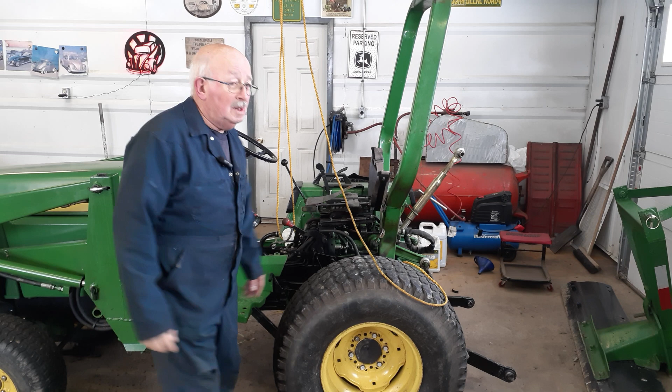If you watched our last video, we had leaking going on right here in this area of the tractor, leaving puddles, and we saw it was leaking out of the 3-point hitch, the flow speed control valve, and all it was was a little O-ring on a spool that was worn out. So we fixed that. That was great, but unfortunately it didn't do it all. Now we find the transmission's leaking. I'll show you that in a minute, and we're getting ready to pull it out.

But more important than the leaks is this little bolt. This $3 bolt could save you thousands of dollars in labor. So make sure you watch this, and I'll explain what I'm talking about.

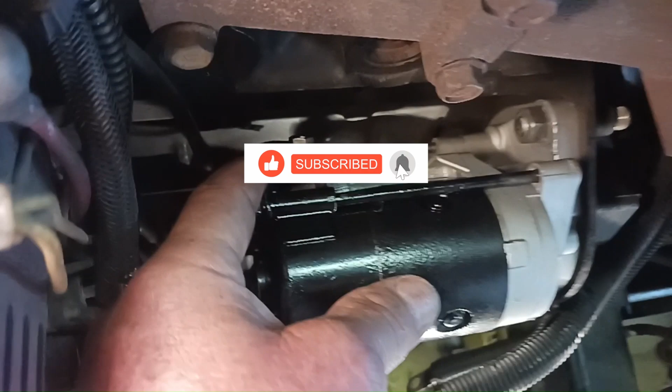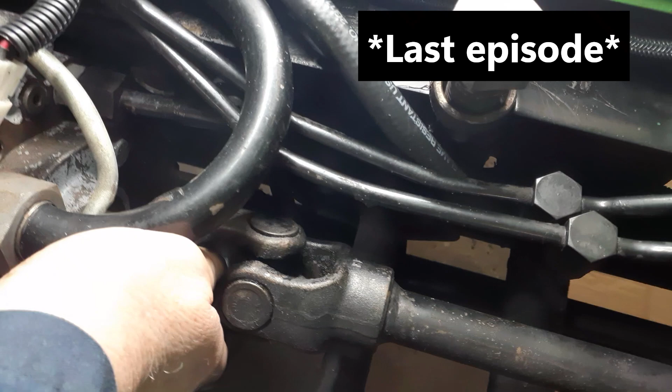But now we have multiple leaks on the transmission. If you look back on last episode, the first leak we have is down at that input shaft. Get in there. Yeah, so that's leaking there. On its own, that would be a pretty easy fix. I would just undo those 2 bolts and that would come off and I could put a new seal in it. But that's not the only leak.

If you look over here, we have a lot more oil coming off there. And I took this off. So that's the 4-wheel drive shaft, and that's not leaking. Where it is leaking is right here at the seam. You can see it just running down there. So today we're going to take all that apart.

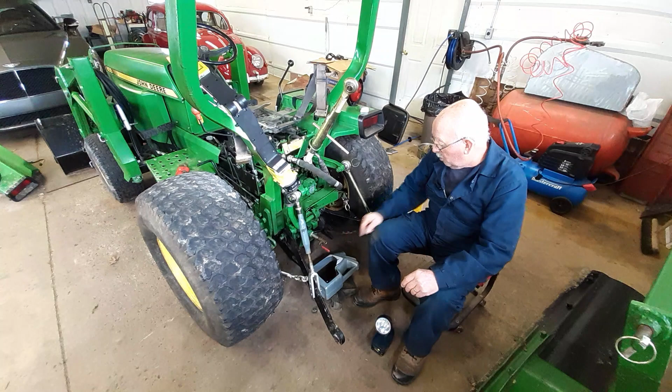At the end of the last episode, we had started draining this. We're almost done. Shouldn't be much left in there, but the less in there, the less pressure. So it's getting slower and slower. There's about 5 gallons in there, and we've got about 3 so far. So we still got a couple gallons to go. Might as well start working on some of the other stuff.

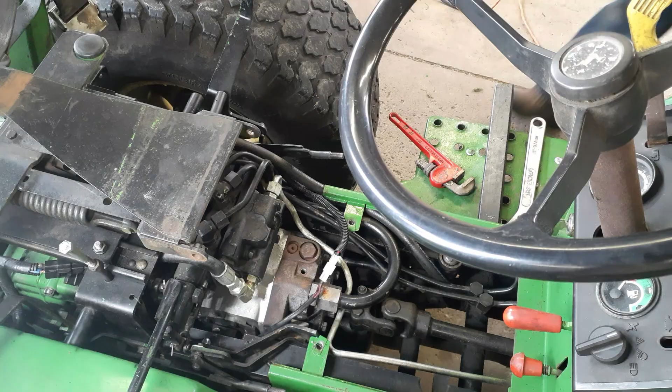So while that finishes draining, let's disconnect the neutral switch here. Get that out of the way. The switch is going to come off with it. And then this is the suction line. I don't know how tight that's going to be, so I got a little extra here. That wasn't too bad.

Oh, there we go. Let me grab a screwdriver here, and I'll loosen this off, and then we'll be able to rotate that line, give us a little bit more clearance. Let's see if we have a bit more room to turn that now. Maybe not. Might be easy to just take it right off, I think. I don't know. There, after a little bit of arguing, I just pulled it right out of the way.

Okay, and this line's going to have to come out. I guess I should have put a drain pan on there. I got a mess to clean up. I didn't think there'd be that much oil in here, but I was wrong. So now I got a nice big drain pan under there. I have to get this out of the way.

And the transmission is going to have to come out forward and drop. So get this out. Take the drive shaft off. Hopefully that's high enough. That should be high enough. And you have a power steering line here. Fifteen sixteenths.

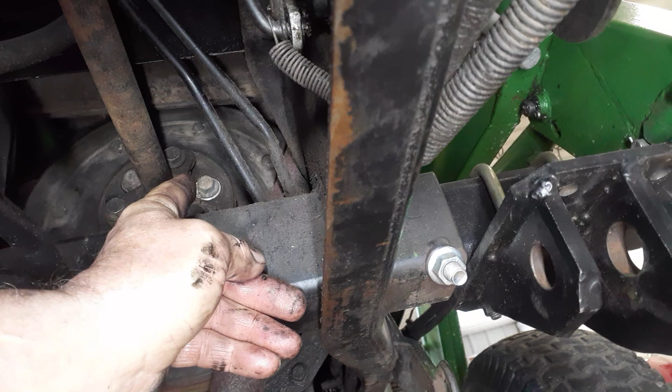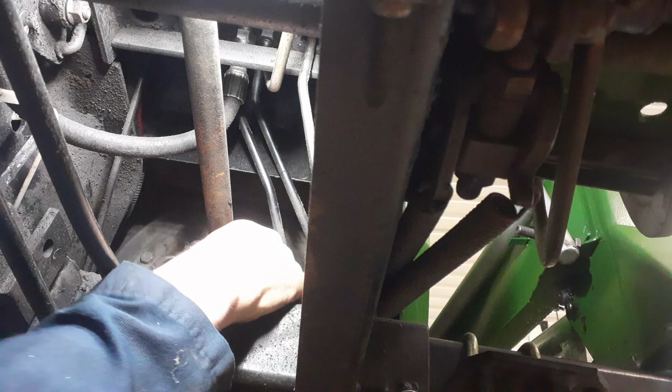So this here, that's where the input shaft comes from. That's basically a drive shaft right from the motor. And you have to undo the 3 bolts there, and you should be able to take that right out. One. Two. I might have to turn that a little bit. How's that? Yeah, that should get it.

Yeah. I think that should be all it takes. I don't think you have to undo all 6. Nope. There we go. Now. Maybe, oh, there we go. Perfect.

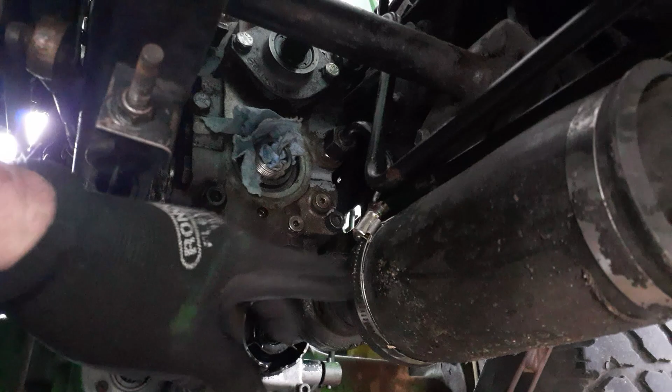So as I showed you before, I already got this loosened off and out of the way. And there's another one at this end. Take the 2 hose clamps out. And just have to line it up. Just line up the shaft. There's one of these pins in the shaft there. That's all that holds it on. Just use a drift and drive it out. Once the pin's out of the way, it just slides off.

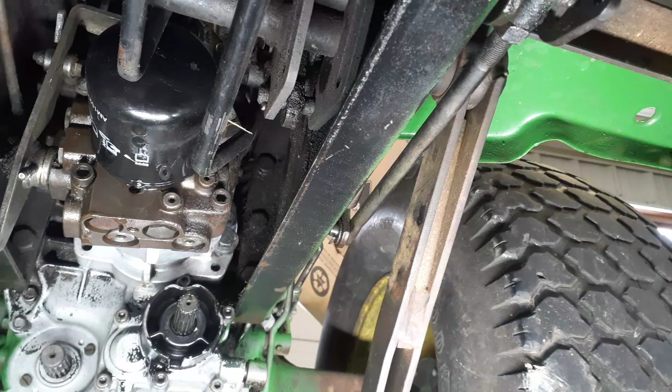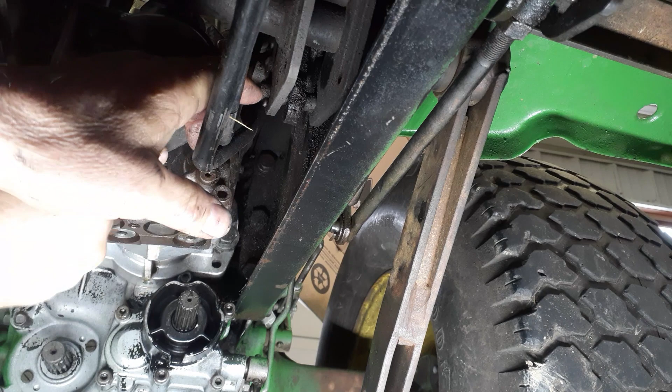There. Okay. So the next thing to come off is the transmission filter. Put the wrench on the right way.

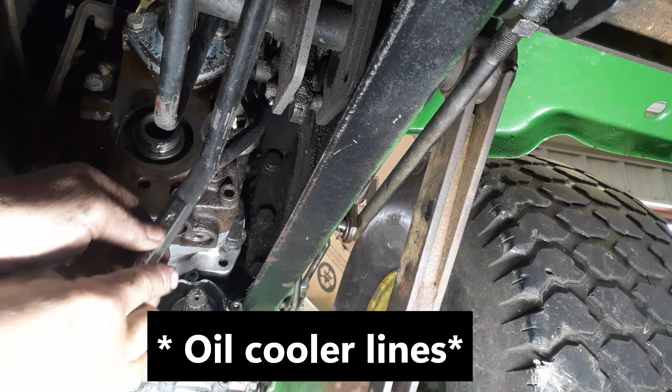It's that much less oil in the transmission to wear when it comes out. There. Get that out of the way. Now that last transmission line there, of course that's bigger. Back to the 15. So this is the other line that goes to the oil cooler. There.

Okay. Now we have to take this linkage off. And there'll be one bolt inside there we have to take off. Right there. Now you don't want to change the position of that nut, because this is what adjusts your pressure on your neutral switch. So I'm hoping to not have to do any adjustments afterwards, but I probably will. But I'm trying. And screwdriver.

Spring comes out. Maybe not. That doesn't like the last couple of threads. Let's see if we can get the spring out anyways. There. Let that hang. That stays there. And all there is the other end of this arm up in there. Let's see if I can get that in there.

Okay, so I have to undo that bolt right there. That's the only part of the linkage we have to undo. It's on both sides. I don't know if I can show you, but we'll definitely try. Okay, 13 on both sides. For now, see if there's any bushings or anything in here. Don't want to lose those.

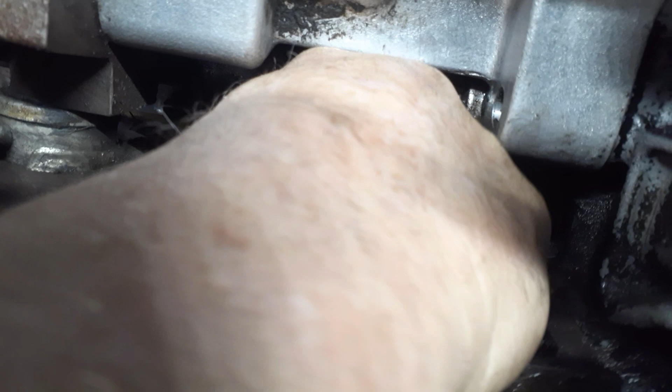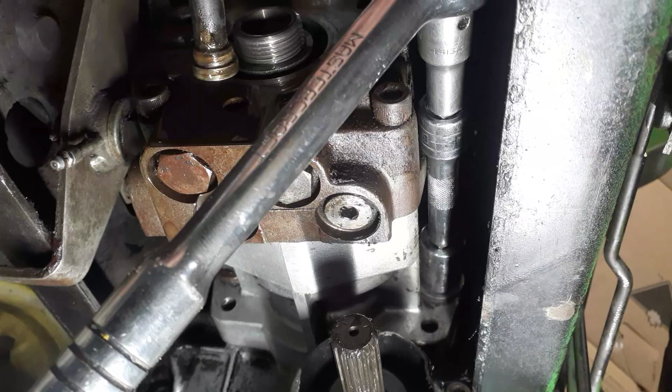My nut. There is a bushing up there. I'm going to put the nut right back on there. It stays long enough for me to put the nut back on. There. That's it. So all it takes now is a bolt there and a bolt on the other side, and that should come out. So we got that bolt undone. And there's another one right there. So they're both loose. So now I got to put a sling on this thing.

All right, so I got my little block and tackle set up here. And I've got the two bolts out of there. So basically that should be everything. This thing's not really that heavy. Maybe, I don't think it's 80, 100 pounds. So this is good for 500 pounds, so this should be fine. Let's see what happens. I'm gonna tighten that up a little bit. All these hoses in the way. There.

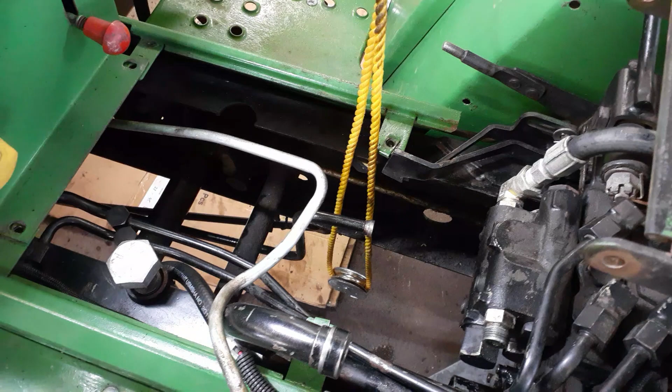Well, it's out, but it wasn't easy. Every single line and little square edge and shaft caught on everything. We had to wiggle it this way and twist it that way. Finally, we got it dropped down, and here it is right here.

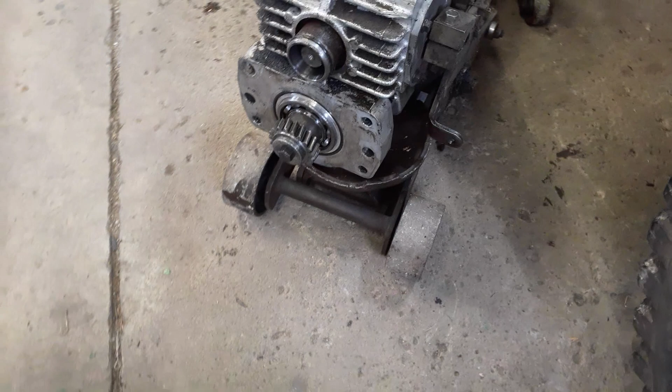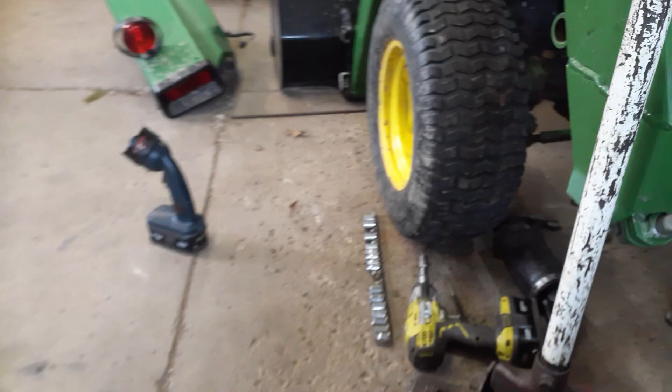So this is what's causing our leak. See that O-ring there? All hard, and this one here is really flat. So I'm thinking that both of them are probably leaking. But while we're here, we'll clean it up. And of course, we have to change the input shaft seal. So we'll change that, change a bunch of O-rings. And once I got it cleaned up, we really got to talk about this thing.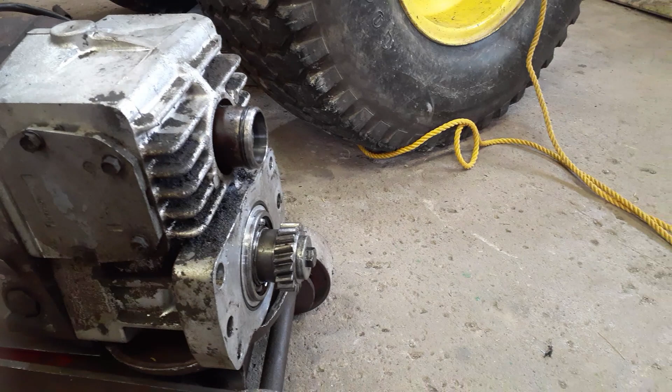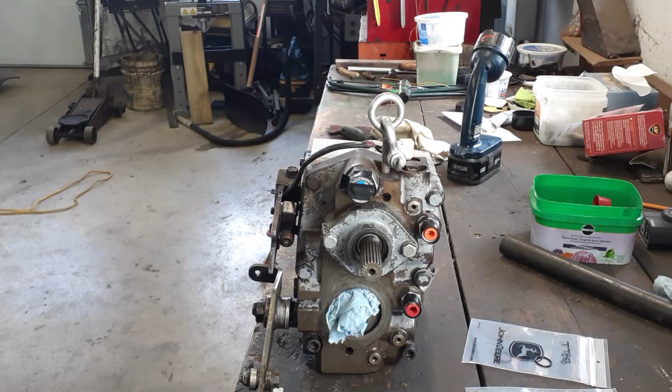Hey, so we got the transmission all out, washed it all off, got most of the grease and guck out of it. So let me bring you in and see what we're going to do to seal it up. Okay, so we pulled those two O-rings out of there. Those two, we got two new ones there. The big one there, that's here. So we got all new O-rings there. And we wanted to get that seal out of there.

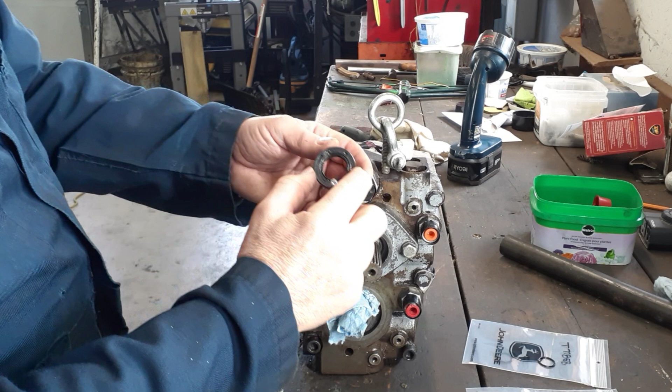You could take this off and maybe push the seal and the bearing out from the other side, but pretty easy, if you're not squeamish, just drill a little hole in it, put a sheet metal screw in there, and you just pry it out with a screwdriver. I had to do both sides. It came out real easy. And I got a new one right here. There's the part number if you guys need it. So I'm going to put this in right now. I'm going to put a little bit of oil on it, and then we'll push it in.

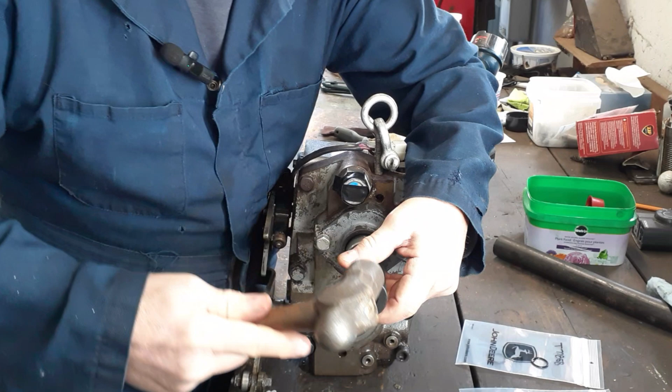I just happen to have a 7/8 locking collar, and it fits perfectly on there, and it fits right in there quite nicely. And around. And as soon as I find my socket, oh, there it is. I've got a 1 1/16 socket there. And that fits in here just nice. There we go. That's it, we're in.

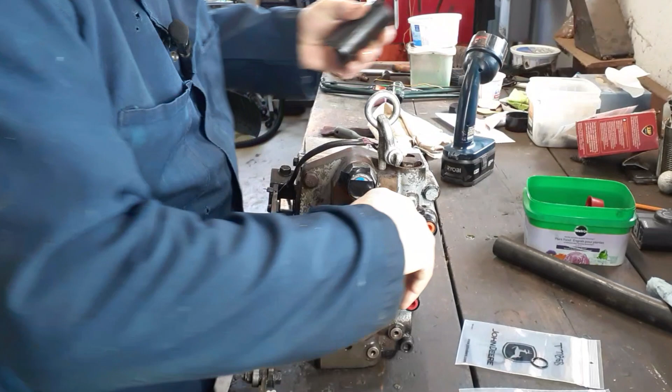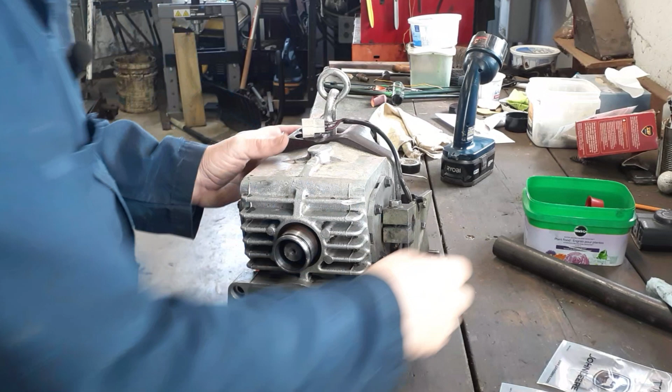So I'm not going to put these O-rings in until we get it in place. I didn't want to damage the threads. I've already scored the threads over here a little bit, pulling it out. So that part's sealed up. So let's turn it around. And we got a couple seals here. We got that one there, that one there. Those are the ones I suspected were leaking.

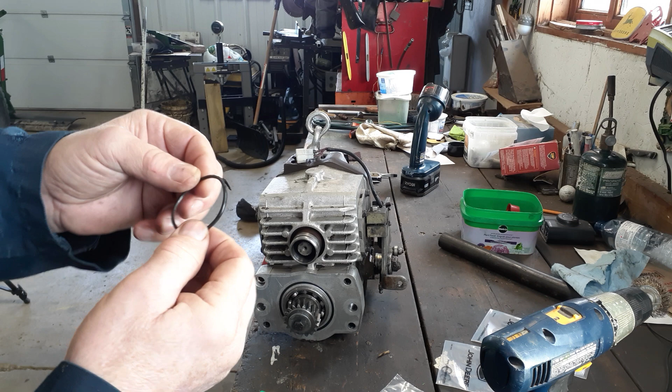So I'm going to pull this little O-ring out of here. Now I probably damaged it getting it out. And I don't think you can see, but inside it's all kinds of little bumps and holes, and that's probably one of the reasons why it was leaking. And this one here, I think is just flat. Being in there so long. And it might be the same. Oh yeah, look at that. Just starting to fall apart. So we got a couple new ones there. Here's the part numbers, just in case you need them.

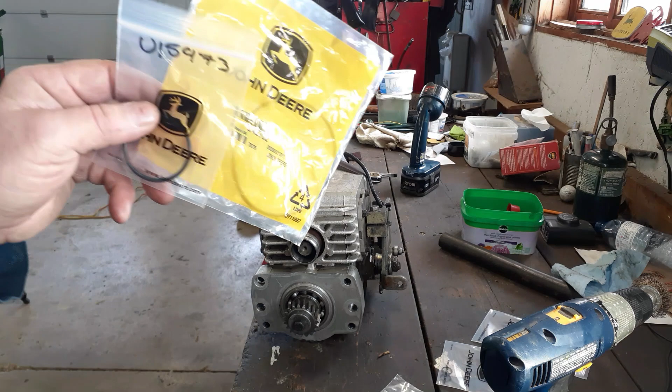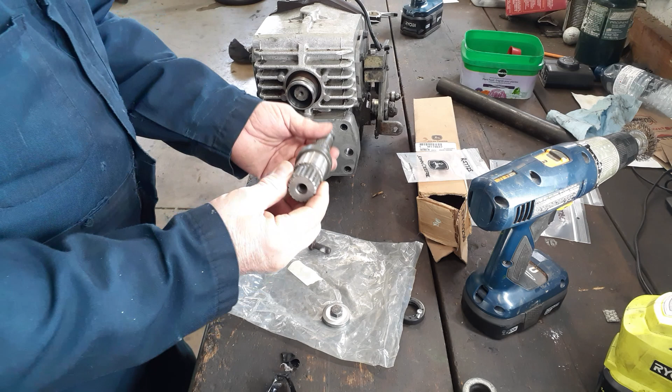But before I put those on, here's the single most important thing you're going to do today, and it has nothing to do with the seals. This here is that shaft, the output shaft. This is out of my other tractor. I have a 755, exactly the same transmission if you have any of these 55 series tractors. And what happens is that bolt breaks off.

And what you end up with is this bolt falls in the differential. So you have this thing rolling around in there. And this falls in there also. And what ends up happening is that gear just slides back and forth on there. And what will happen is you'll be able to drive forward fine. You won't be able to back up. As you back up, the gear will slide out, and you can see where this one is rubbed. And it would rub against there. And it won't go in the gear. You put it forward again, and it'll slide back into place.

But you take a chance of that bolt getting jammed up in there. And let me show you what it takes to get that. That head of the bolt, when it comes off, it drops in there. And it drops down inside here. And the only way to get that apart is to take all these bolts out, but you can't get that out while it's in the tractor. So you basically have to pull the whole differential, this whole back part of the tractor, out.

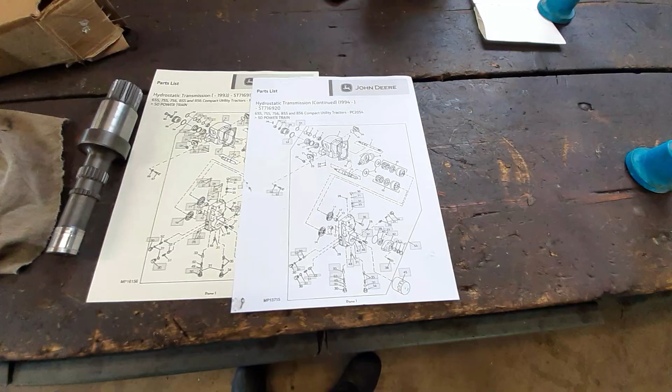All right, so changing that bolt is definitely going to help. But it's not going to guarantee that it won't ever happen. All you've really done is reset the clock on this wearing out, breaking. But there is another option, and this is why I have the shaft here out of my 755, and I'll show you here on these diagrams what I mean. John Deere knew they had a problem with these transmissions, and this is the shaft, again, out of my 755, the same one that's in this 855, and that's one right there. And you can see it has the bolt and the washer at the end.

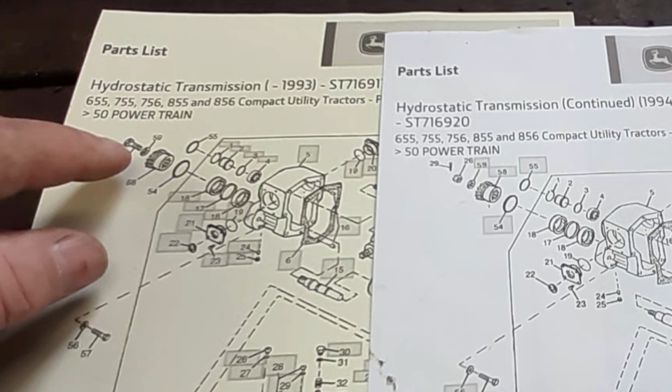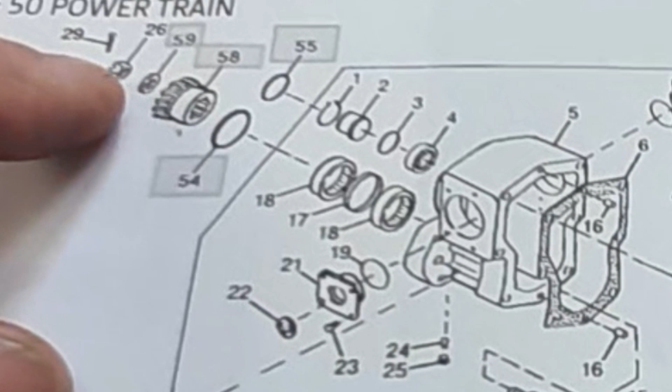Well, they produced that same model until '93, and then in '94 they came out with this one, which is a different shaft. Instead of having a 3/8 hole threaded in the end, they extended the shaft and they made it 5/8 and they threaded it. And over there, they put a castellated nut and a cotter pin, and it won't break again. It's much stronger. So that is an option.

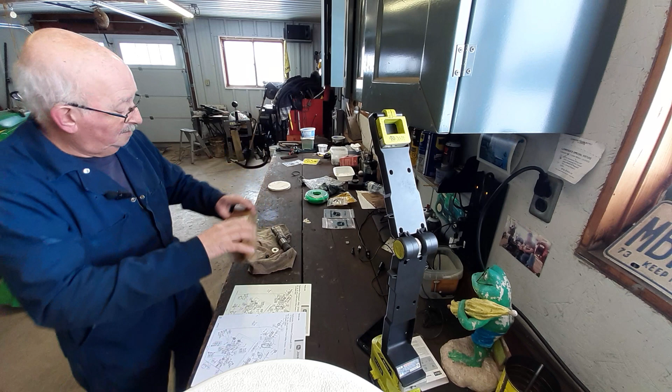I replaced this out of my 755 because the head broke. I had to take the whole tractor apart just to get this out. I didn't want it to happen again. I used the tractor a lot, backing up, back and forth, cutting grass. I just didn't want to go through it again. So I bought the updated shaft. There's the part number. Now, at the time, this was about $200. That was at least 10 years ago. But again, I didn't want to have to do it again. And if you're paying labor to have this job done, it would cost thousands.

I just priced this. This is $500 now. I would have changed it if it was maybe $300, but I won't change it at $500. I personally don't think I'll use this enough in that fashion to break this again. But again, I'm just spinning the roulette wheel. It could happen. I hope it doesn't. So this is just another option. But again, if you're paying labor to do this, it'd be well worth it.

I just heated this up with a propane torch, and it came off pretty easy. Now, I don't know if this has been off before or whatever, but there's some red thread locker in there. So who knows how many cycles this has had. So I'm not going to trust this. For $3, you're way better off just to replace it.

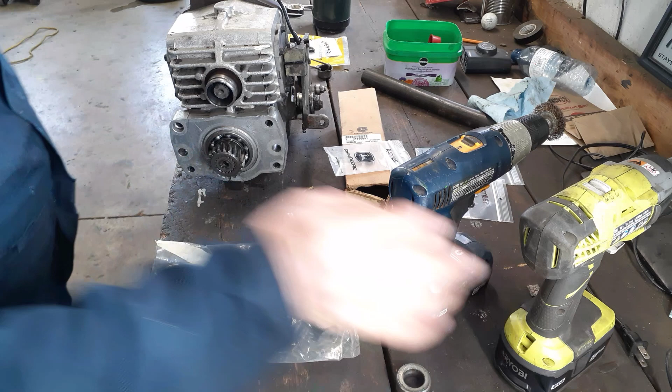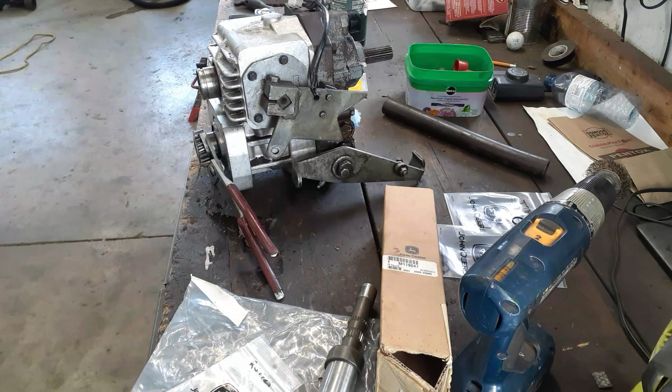Like I said, see that gear just slides on and off. And if that bolt falls out, the gear just slides out of connection and slides back again. Okay, the shop manual calls for medium strength thread locker, and it looks like there's already some on it, so I added some more. I blew the threads out really good with brake cleaner and some air.

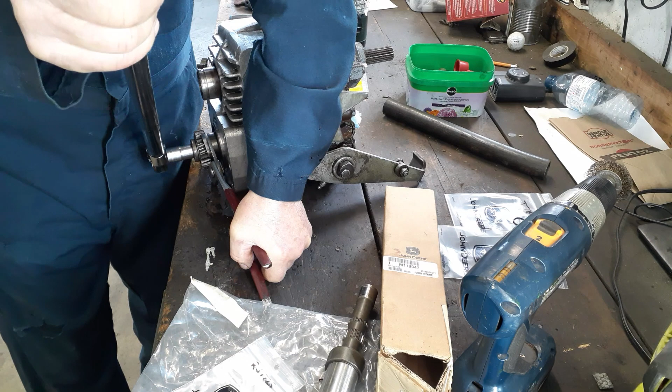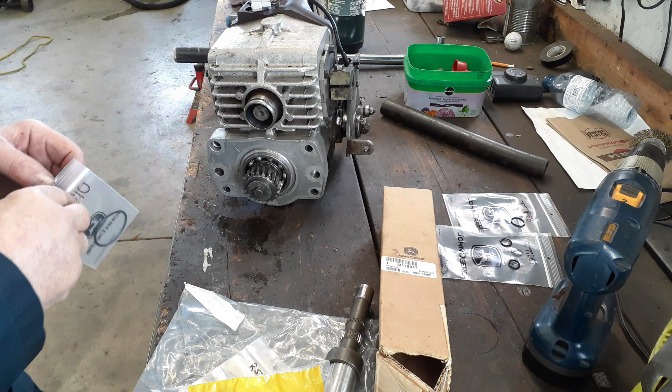There, 40 pounds. That's what it calls for. Okay, these are the O-rings that go where I suspected was the leak. So this here, I used a wire wheel, brushed it all up. A bit of oil. Definitely feels a lot thicker.

Well, this looks like it's too big. Well, maybe not. That's the way it goes in. There. All right. It's ready to go back in.

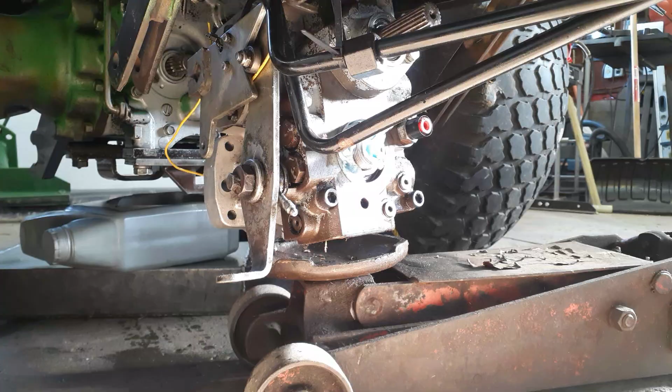So I've got the transmission on the floor jack, and I've got this here tied. So this part, the spring purchase is at the bottom. So now that won't get in the way. So we just have to gradually try to lift it. I've got these tied out of the way and try to lift it, see if we clear everything. I know it won't be easy. Have to clear that four-wheel drive shaft.

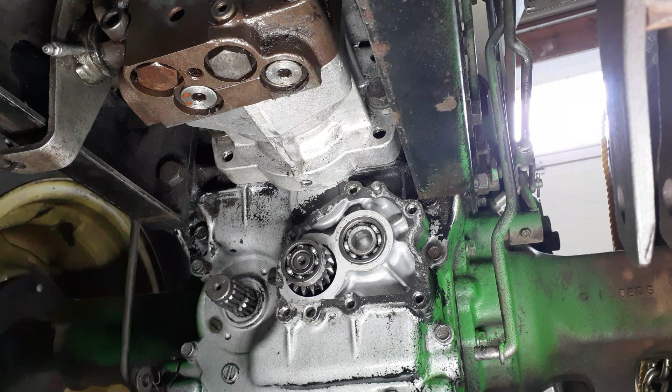Okay, I struggled with this a bit, trying to get it in. And the main problem was the shaft for the four-wheel drive. Kept getting in the way. This goes over here. And so I just finally unbolted it. And all it is going to be is a $5 gasket to replace that. So I got to wait for that to come in.

So anyways, after that was out of the way, with my little block and tackle on the floor jack, it went in not bad. A little bit of a struggle getting in on this spline, just like any standard transmission, basically. I got the 2 bolts in, the main bolts, they're torqued to 105. And the transmission cooling lines right there. Got new O-rings on there, they're all in.

Get you zoomed in here. So that spring's back on again, back to adjustment. And that 1 bolt in there is back on. So that's all back together. I'm waiting for that gasket to come in. I got to clean that up, and then we'll finish putting it together.

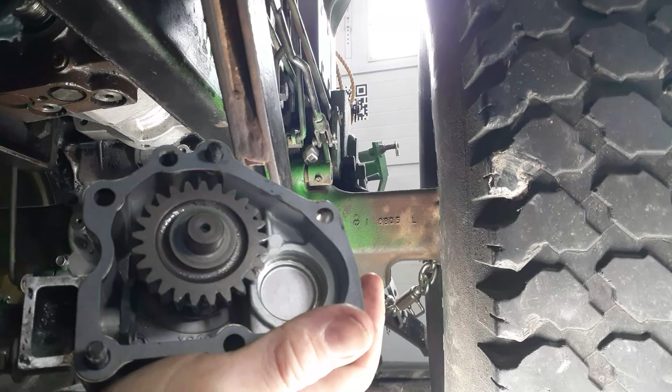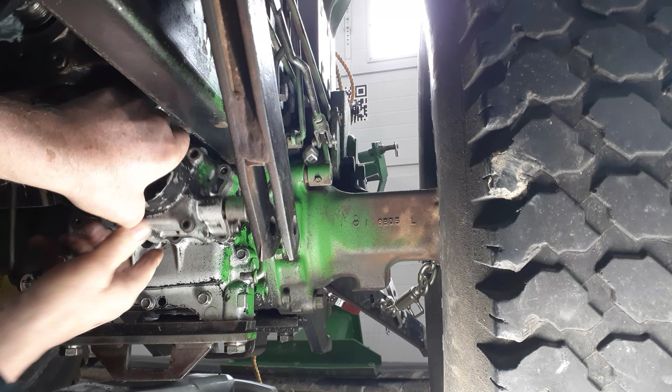So I've got a new gasket on here. I got it all cleaned up. Got a little bit of gasket shellac to hold this in place. And I've got that all cleaned up. So now I'm going to put this back together. Hope we can get it to line up.

There we go. There. Took a little bit of wiggling, but the gears meshed up.

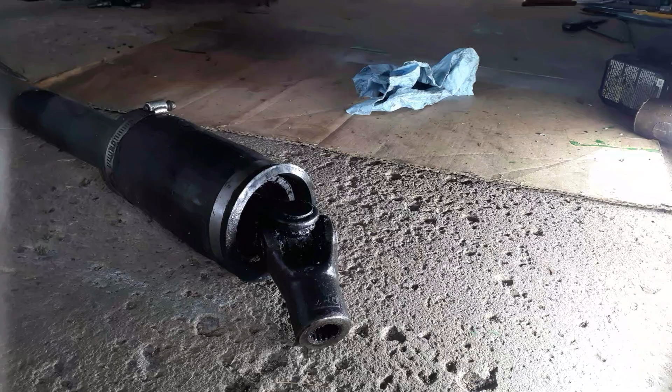All right, now we can start putting the other things on. So while this is on the ground, really easy to get to, put a couple shots of grease in it. There we go.

Okay, let's start with the four-wheel shaft. And it goes on basically the same way it came off. That end slides on. Pretty straightforward. Just get on the spline. Just make sure it's in neutral so it spins. There's a little bit better light now. There's a hole lined up. There's a hole in this.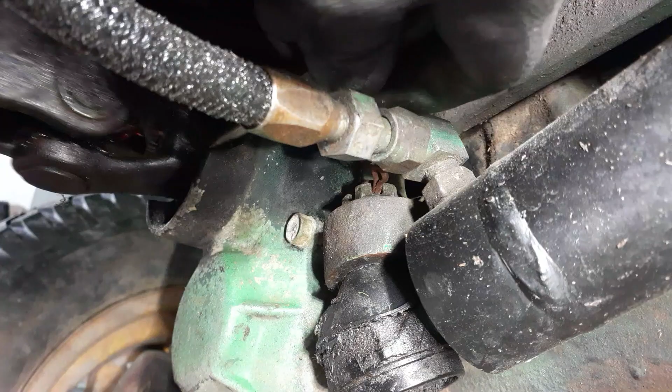There. Let's see. I think I got it. Get my drift. A lot easier when there's not a camera in the way. There you go. So that's it. All I gotta do is put that pin in, and it's gonna be a lot easier without this camera in the way.

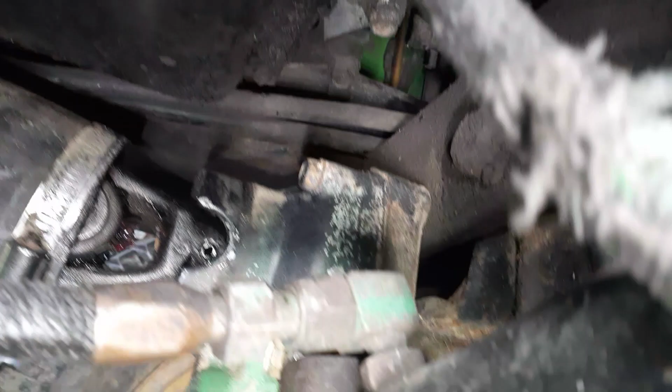There's that drift. That spring pin's in there, and it's flush on both sides. Slide the boots back on, make them even both sides, and tighten up the clamps. That's it for that, and then we'll do the main shaft.

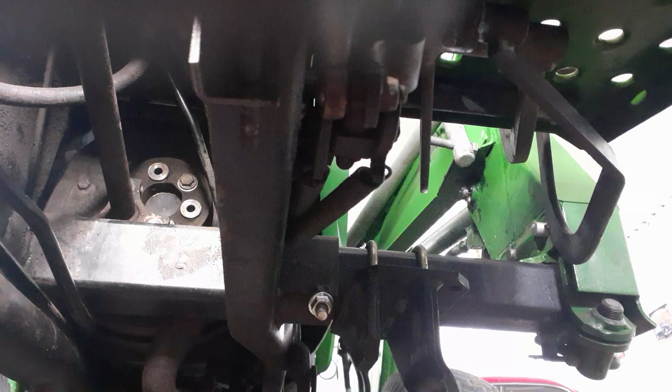So I put the other end of the spline on there on the transmission, and I greased it before I put it on. So it's just a matter of lining up these bolts.

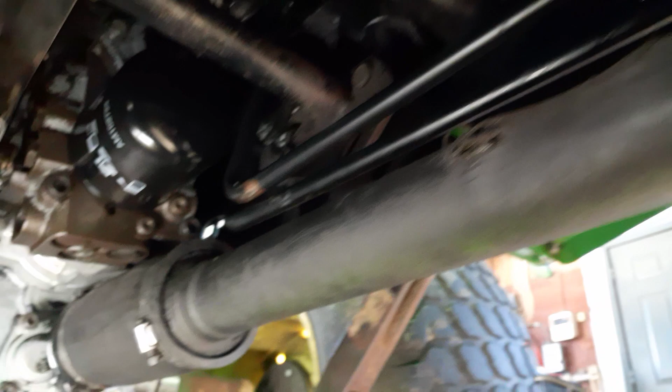So that drive shaft's all hooked up. Both ends, all the rubber collars are back on there again. Transmission filter's in, and the transmission lines are hooked up again. I hope I haven't forgotten anything. All right, let's head up top.

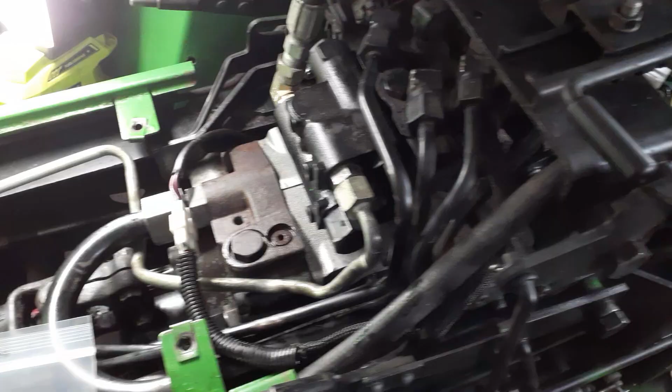Like I said, that drive shaft's tightened up. I've got that fitting back together and that fitting back together. Those are the two O-rings that I had to put in there. This is plugged back up. So I still have to tighten this up. But first I want to check the hydraulic filter.

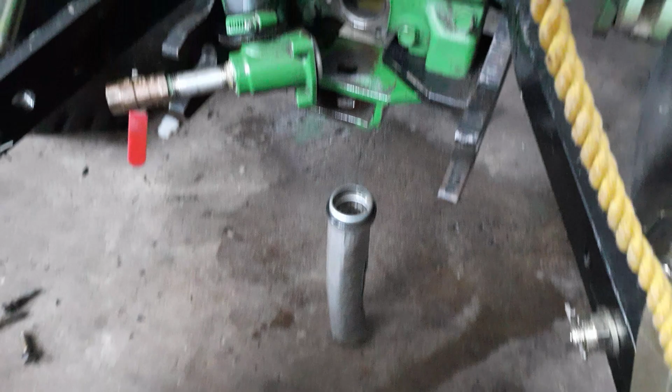So this goes in here. I've already cleaned it. I washed it out in diesel fuel. You can use mineral spirits, whatever. And so since you've already got all the oil out, it's the perfect time to clean this. And it just goes up in here. And then we'll start filling it.

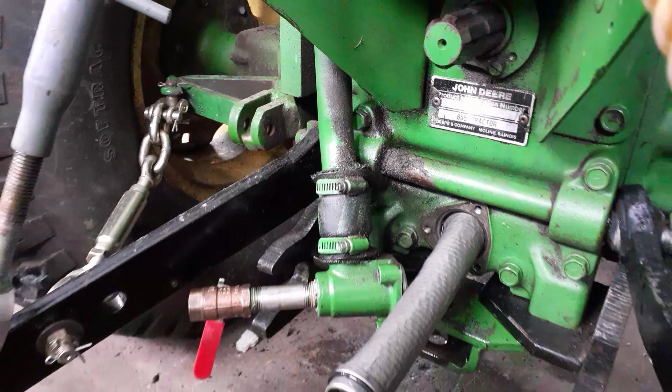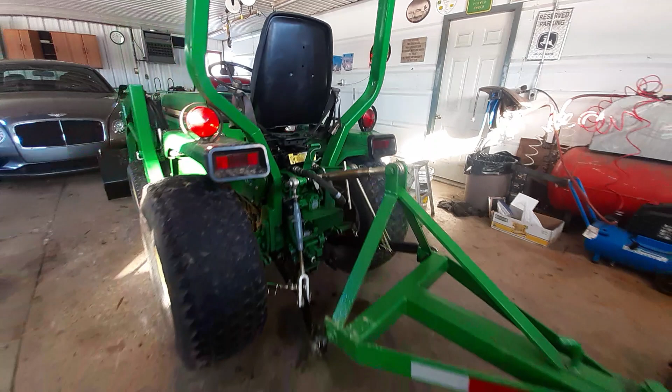Okay, so it's all back together. All the floor plates are on. Got the fender back on. She's all filled up with fluid. And I've got the blade back on. And we got a bit of snow out there. So let's go try it out and see if it wets itself again.

To be honest, there really wasn't enough snow to do out there, but it was just an excuse to try out my repair. So I did about 4 of the neighbors' driveways. I was out for maybe an hour. So we'll let this thing dry up overnight and we'll check it out. Hopefully we got no leaks.

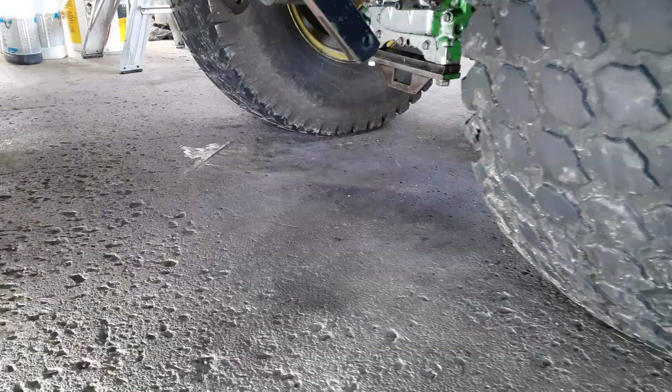Well, look, Ma, no leaks. I've used it for a good hour or so, pushing snow around, and there's not a drop on the ground. Everything's nice and dry there. So it really makes me happy. Well, I figured I'd finish this video off before it started leaking again. Right now, there's no leaks, but that probably won't last. This little critter will obviously find another spot to wet itself.

In my last video, I mentioned about pulling the transmission out, and one of my viewers, Glenn, stated that I'd be on the struggle bus for doing this, and he was right. I did ride the struggle bus for a while, mostly just getting the transmission out. And if I would have just gone with my gut and pulled that 4-wheel drive output shaft adapter out right away, it would have been a lot easier.

For the amount of time it took to take that off and a $5 gasket, it just made everything so much easier. I would have got the transmission out a lot easier. It went back in way easy. So that was really good. But anyways, getting back to this, we got the leaks fixed. They were a minor issue, but I'm glad I got it done.

But the main thing was I wanted to get that bolt done. So it was $3. It was nothing. I've experienced where I've had to pull the whole tractor apart to get the head of that bolt out, and that's not much fun. And like I stated, if you had to pay for that, it'd probably be 8 or 10 hours of labor to take it all apart, plus your gaskets and stuff. So you'd be into it for a lot of money.